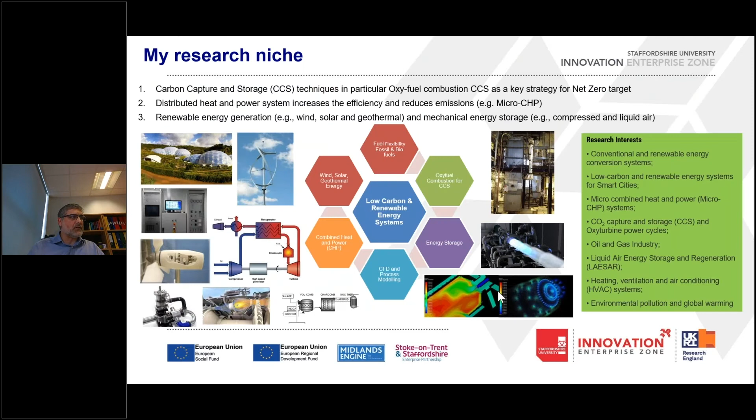All right. The headline of the talk, I'm having two monitors, so bear with me to make sure I'm synchronizing these two very well.

So, are we responsible for global warming? That's the first question to answer. And definitely, if we are responsible, we need to act accordingly. And the Paris Agreement was actually a conclusive effort of all nations to tackle the issue of global warming. So I'm going to give you a picture of the UN Environment emission gap reports and the recent report published by the International Energy Agency, Global Energy Review 2021.

And in particular, we're going to be focused on carbon dioxide emission, sustainable development scenarios, and how to react towards the aim and objectives of net zero in heavy industries, by using renewable energy systems, by using carbon capture, storage, and utilization, and looking into green buildings and electric vehicles. And at the end, I want to have a few snapshots on the UK 10-point plan for a green industrial revolution and how we are coping with that plan to achieve net zero.

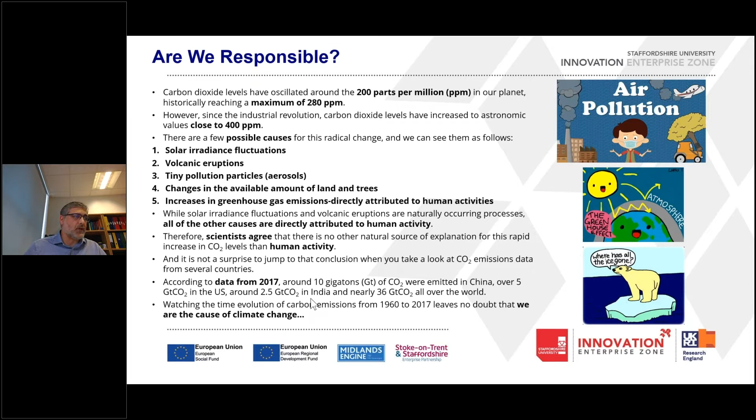Of course, there are some natural causes like volcanic eruptions, solar fluctuations, pollution particles, and land and tree uses, changes in available amount of land and trees. But increase in greenhouse gas emission attributed to human activities seems to be the only one which nature cannot deal with. So we can see that jump in level of emission since the 19th century, or after the Industrial Revolution, until now.

Consequences are really complicated and difficult to deal with, from rising of seawater levels to longer and harder droughts across the world, destruction of the ozone layer, heat waves, and of course what we see nowadays, strong hurricanes, storms, snowfalls, hailstorms, and sandstorms all around the world. So clearly we see the effect of that emission increase in carbon dioxide and other greenhouse gases globally.

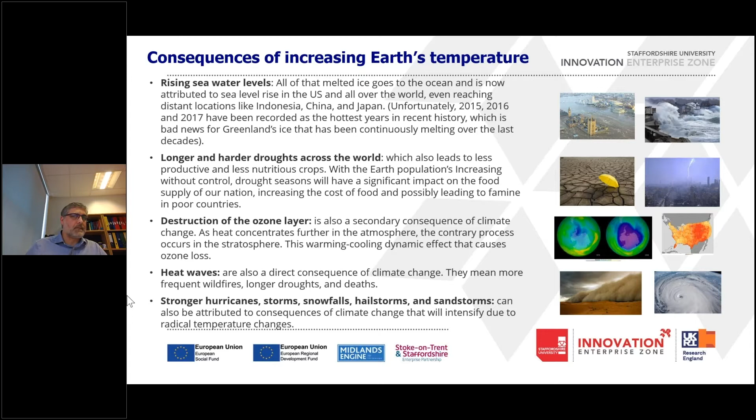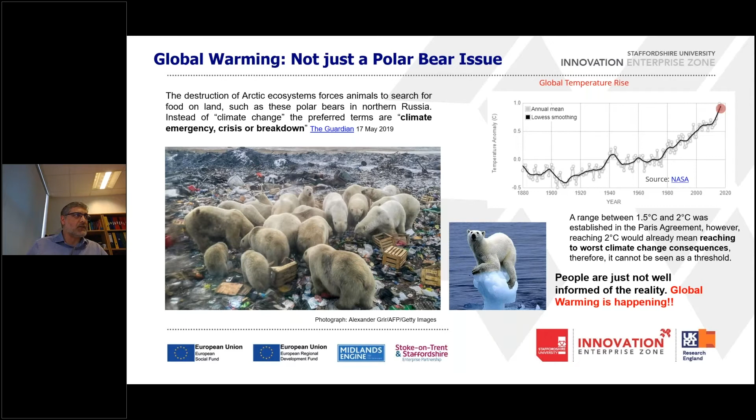Is that only a problem for polar bears? When we talk about global warming, normally images like what you see in the middle are what make us think this is a time to act. But the picture presented in the Guardian in 2019 shows polar bears are approaching cities in North Russia, actually for food. And that means it's not climate change. We need to think about climate emergency and crisis or breakdowns.

That's great. Nations came together. They decided in November 2016 to help each other and help the planet to survive. And since then, efforts and plans are being published and several fundings are being allocated, although there's still a long way to go to make sure the temperature of the globe is not going to rise more than 2 degrees by 2050. And of course, we need to aim for less than that level, hopefully approaching 1.5 degrees maximum.

This is a very good slide actually from the report published by IEA straight after the Paris Agreement, and it showed us how different technologies can play their own role to tackle the issue of climate change. This graph shows if we want to stick to the 2-degree scenario, renewables have 32% of the global carbon emission reduction, avoidance, or capture by 2050, followed by CCS, carbon capture and storage, 12%. And that 12% is a huge amount of carbon emission. That's around 94 gigatons of carbon dioxide that has to be captured by 2050 using carbon capture.

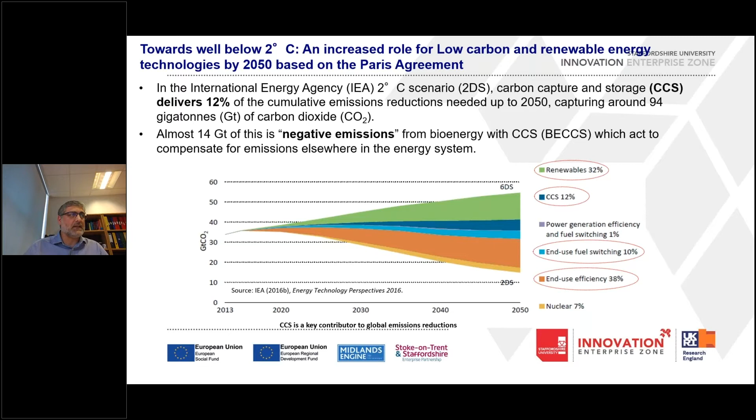Or in addition, negative emission, which means burning biofuels as a renewable source of fuel and, on the other side, capturing CO2. That's going to have a share of 14 gigatons by 2050. That's called bioenergy with CCS, or BECCS. It's really interesting to see end-use efficiency has got a big share of 38%, which has been increased to 40%, and fuel switching nowadays is quite important. So alternative fuels, including biofuels and hydrogen, are progressively advertised and promoted to tackle the issue of global warming and carbon dioxide emission.

This is a more recent report from IEA. As you can see, efficiency will have a share of 40%, followed by renewables, which now have a share of 35% of the total target by 2060. And CCS will have a share of 14%, followed by nuclear 6% and fuel switching 5%. So all the technologies which will have to come together to help us achieve net zero are going to be a branch of one of these main solutions or main technologies that contribute towards net zero.

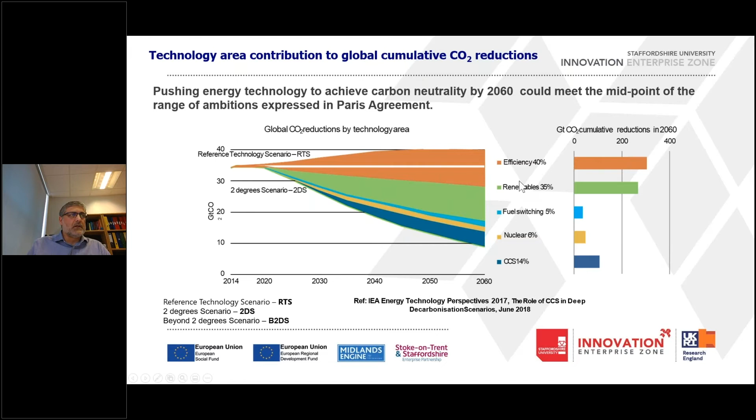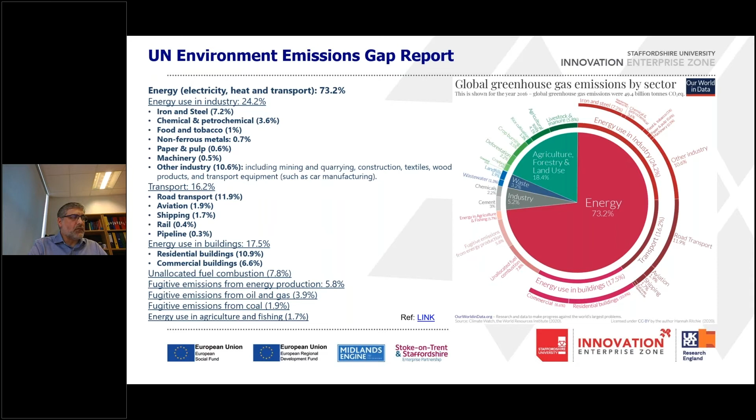The UN Environment Emissions Gap Report shows that energy-related activities are the main source of global greenhouse gas emission. This is a good graph showing how energy has a share in greenhouse gas emission by sector. Energy use in industry has a share of 24%. Transportation has a share of about 16%, followed by energy use in buildings, about 16–17%. And it goes on to other sources of energy use. In all cases, energy is the main factor in terms of carbon dioxide emission, based on this UN Environment Emissions Gap Report. For that reason, the Global Energy Review 2021 from the International Energy Agency has been published.

Quite informative reports prepared by IEA. There are several general facts. First of all, global carbon emissions are set to jump 1.5 billion tons this year after the economic recovery from the COVID crisis. So we've had a little bit of a drop in 2019 and 2020, but again in 2021 we see that although the COVID crisis is still ongoing, the energy industry is going to recover, and emission is something which we have to be aware of and act upon.

So global energy-related carbon dioxide emissions are heading for the second largest annual increase ever in 2021. Coal demand is actually exceeding the level of 2019. In some countries, European countries, coal mining and coal burning have decreased tremendously. But in some countries like China and the US, we see coal still having a major share in the portfolio of energy generation.

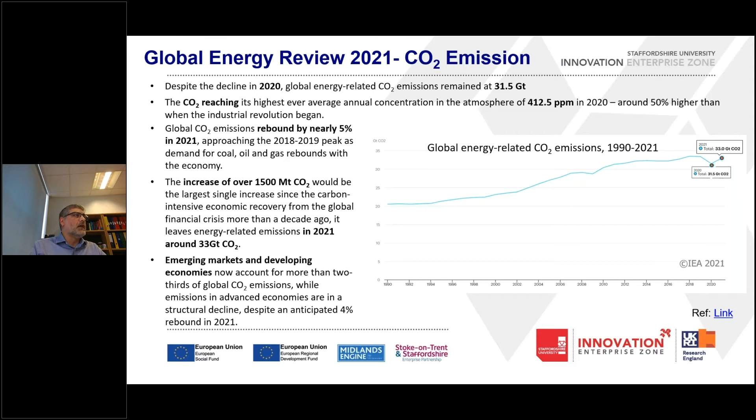All right, what do we need to do? We have to have sustainable development scenarios developed. Of course, there are sustainable development goals, SDGs, and based on those, we need different scenarios to be able to tackle global warming, to tackle emission of carbon dioxide, and to maintain the temperature increase of the globe around 1.5, 1.6. In fact, 2 degrees C is the highest we can imagine.

We shouldn't be comforting ourselves with a 2 degrees C scenario. And of course, the 1.5 degrees C scenario above pre-industrial temperature level requires a lot of attention and, as I said, different scenarios to act upon and basically invest enough to be able to capture enough CO2, remove enough carbon dioxide, and avoid enough CO2 to make sure we're achieving the targets of net zero.

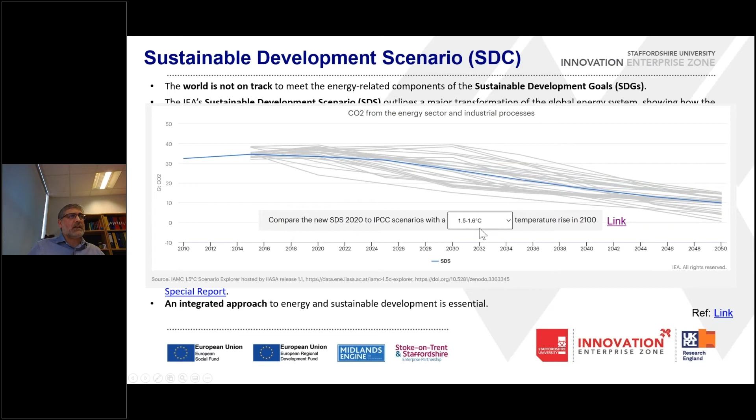This is a good picture. There is a link here. We can change and compare sustainable development scenario goals separately. If we change temperature here, when going to the link, you see the blue graph is going to move, and shows how change of that temperature increase is going to affect the level of emission.

Excuse me, give me a second.

So what is clear, the world is not on track to meet energy-related components based on sustainable development goals. For that reason, we have to have different actions done, and these actions are summarized in the next few slides, which I'm going to present. First of all, we have to think about improving the share of renewables. As you have seen from the IEA report, a share of up to 35% is allocated to renewables.

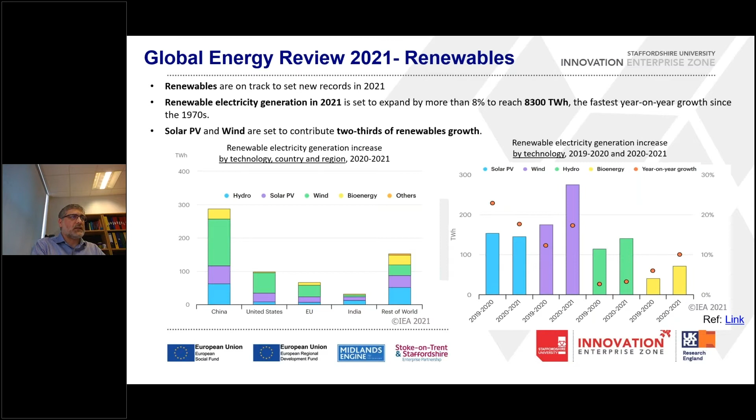So as you can see, solar PV and wind are set to continue to contribute 2/3 of the renewable growth by 2020 and 2021. This picture, left-hand side, is renewable energy generation increase by technology, country, and region, and the right-hand side shows it only based on technology. So you can see wind has got the maximum growth in terms of renewable energy share in 2020 and 2021.

Industries, I think, are one of the major sources of global greenhouse gas emission, which has been receiving the minimum attention. We have been focused on power stations and the power industry, but industry processes, including steel, cement industry, glass industry, all have a huge amount of emission, and they need our attention, particularly burning mainly fossil fuels, because they need high temperatures.

For instance, in a steam cracker, 1000 degrees C. In a blast furnace, we need 1500 degrees C. So the high temperature requirement of heavy industry is one of the main challenges we are facing in terms of achieving net zero emission in heavy industries.

These industries normally have long-lived capital assets. They are built typically to work for 30, 40 years. It's not easy to retire them early and switch to alternative technologies, because this is really costly. There are processes that have emissions, and these processes involve different raw materials and have limited market applicability.

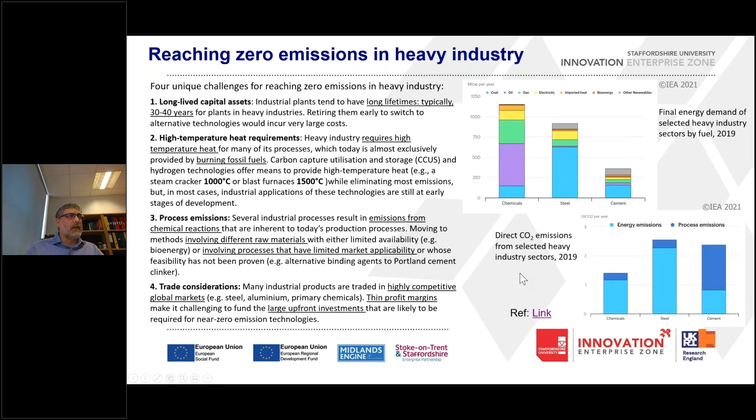In terms of efficiency improvement, which is another aspect of net zero, as we've seen, 40% of the share goes to energy improvement. New technologies have to kick in. For instance, we need to think about green buildings, which can survive by themselves. They have their own means of heat and power generation, which are mainly renewables or low carbon technologies. We have to think about integration of cogeneration technologies, because the combined efficiency of cogeneration technology is normally higher than when we generate electricity in a centralized manner.

In terms of material efficiencies, improving efficiency of furnaces, steam turbines, gas turbines, and bringing new technologies, these are all important aspects to be able to cover that 40% emission reduction using efficiency improvement. In fact, a good sentence is: energy efficiency is the first fuel for achieving high ambition climate goals.

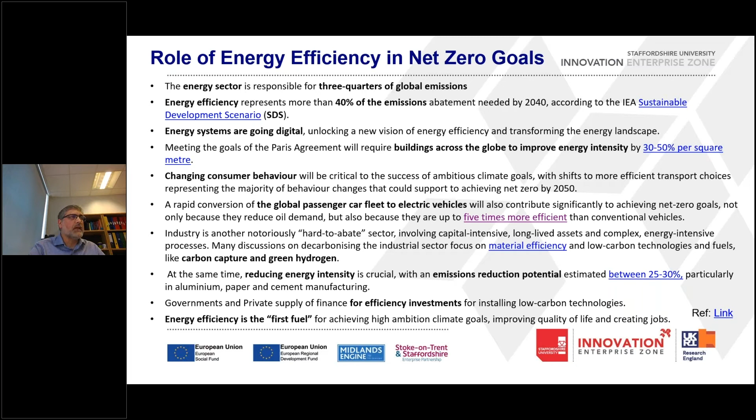Another aspect of net zero emission is green building envelopes. Unfortunately, still in 2019, 2/3 of the countries are lacking mandatory building codes, energy codes. So that means more than 5 billion square meters were built last year without mandatory performance requirements. That is a red flag that shows from the building industry we have a lot of work to do. Energy intensity reduction in buildings is quite important. Insulation, using renewable sources, capturing CO2 from small scale, let's say boilers and heating or cooling systems, that's quite important.

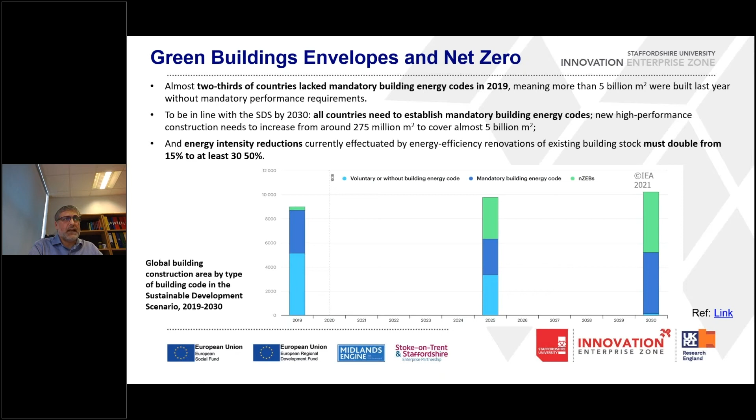2020 seems to be the decade of electric drive. We have had announcements from governments to stop building new diesel and petrol engine cars. The global electric vehicle outlook has been published, and it seems the electric vehicle stock has been boosted to 7.2 million electric cars in 2019, which is quite impressive. But this is going to increase as we speak, and we're expecting to see more battery electric vehicles and plug-in hybrid electric vehicles in 2021 and onwards. This means, again, another key milestone and another important pillar towards net zero emission.

I have spoken about carbon capture, utilization, and storage. This is a key milestone and a key pillar for the net zero targets. It's literally impossible to achieve that target without storing carbon dioxide in underground reservoirs, which might also help in recovery of oil and gas. But the point is, there are carbon capture technologies out there. There has been good funding to support the research. Now it's time for government and private investors to act and help industries and the energy industry to install carbon capture plants, as well as to make sure there are means of transportation and storage available.

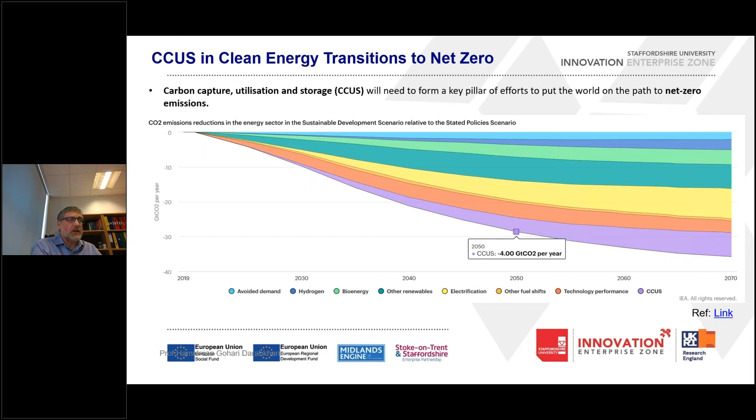So this picture gives another aspect of net zero by 2070 in this scenario published by IEA. By 2020, net carbon dioxide emission is expected to be about 34 gigatons, but that net emission should drop to 27 by 2030, drop to 9.4 gigatons by 2050, and achieve net zero by 2070, according to this report published by the International Energy Agency.

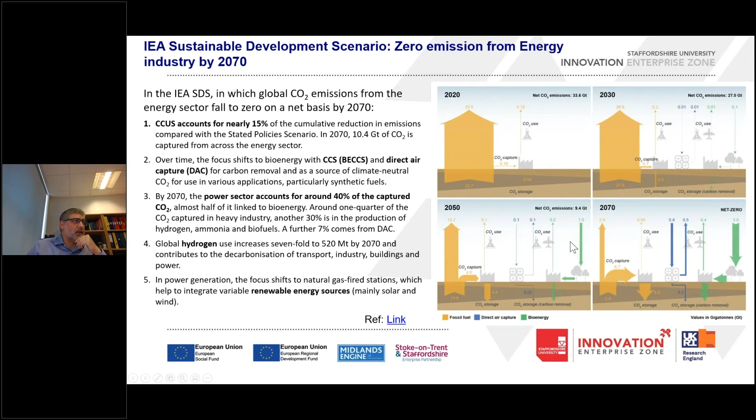Do we have enough means of CO2 storage? Yes, the focus of research in CCS is now being tailored towards the storage side. There are some publications available that show the world capacity to store carbon dioxide is quite acceptable, and definitely we need that storage level to be able to achieve net zero targets.

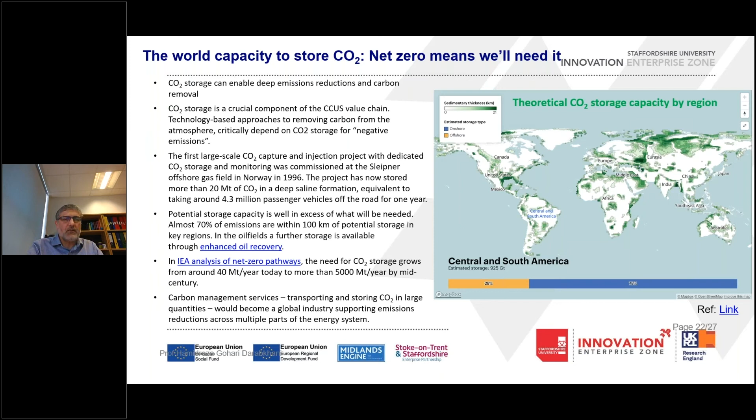What is important, of course, is that some part of this carbon dioxide is going to be utilized, used in industries, but the majority has to go to a storage site. But it does have another benefit, as I mentioned, in enhanced oil recovery and enhanced gas recovery.

So these scenarios are not unique. Countries and, on smaller scales, industries need to have their own net zero strategy plan, but they have to synchronize with each other and sing together to be able to achieve the net zero target globally.

Chapter 3 of the report is about impacts and risks, and chapter 4 about global response, which is essential and necessary to achieve the IPCC 1.5 degrees C scenario. And chapter 5 is about sustainability and equity, about interactions of climate change and climate response.

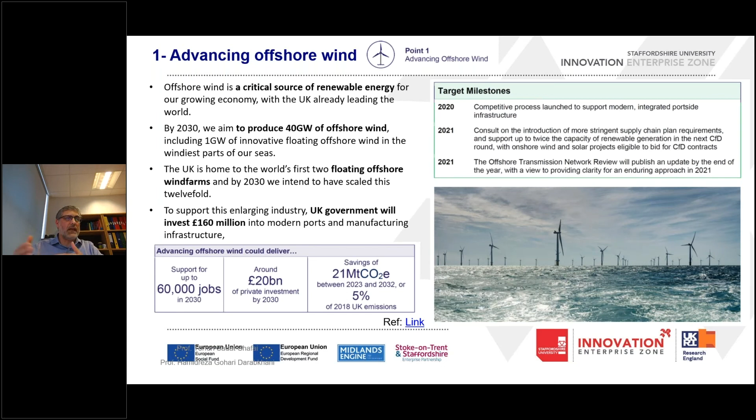Low carbon and hydrogen is quite important. Hydrogen is not just the fuel of the future, but it's the fuel of the present. At Staffordshire University, we have particularly focused our attention on hydrogen combustion, and there are publications that we have recently published in terms of design of small-scale hydrogen combustors for micro gas turbine systems, and hopefully in future for boilers and burners and so on. It followed the successful experience we had in burning biogas in micro gas turbine systems.

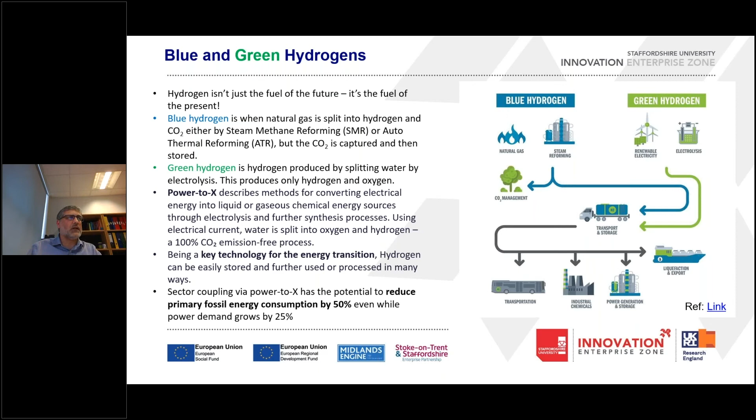This is a very good graph I found from Siemens. We have two forms of hydrogen, blue hydrogen and green hydrogen. Blue hydrogen comes from steam methane reforming, and green hydrogen normally from separation of hydrogen and oxygen from water, hopefully from renewable electricity sources. And this picture shows how different industries can act in terms of hydrogen generation and hydrogen consumption.

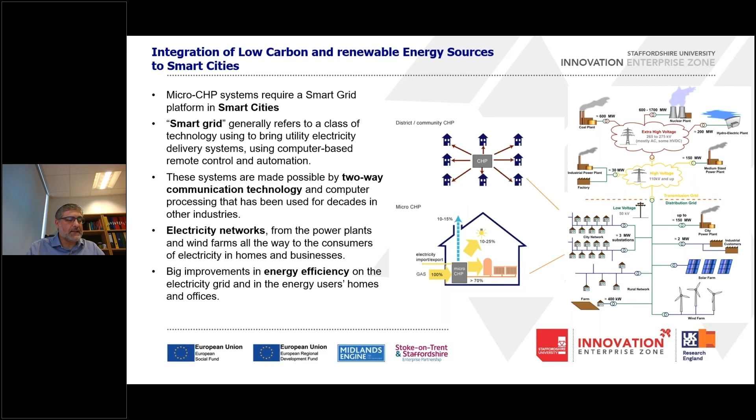And finally, all these technologies we discussed need to come together and join in a smart network in smart cities. So if we have wind farms, solar farms, power stations with capture, micro CHPs and geothermal energies, all of these technologies need to be able to synchronize. We still have challenges in synchronizing electricity generated by renewables with electricity generated by fossil fuels. And there are good investments and research ongoing to tackle the issue. In some countries, a smart grid is still a challenge. Without that, it's not possible to have smart cities and net zero emission buildings.

To summarize, watching the time evolution of carbon emission leaves no doubt that we are the cause of climate change. We are responsible for 3/4 of the global emission. The world is not on track to meet the energy-related requirements based on the sustainable development goals, but there are very good movements ongoing in some countries, and of course this is a global effort. Wealthy countries need to help others to be able to achieve goals and targets.

Energy efficiency is a quite important factor. So steel technologies, which are carbon intensive, have to achieve higher efficiency levels. Renewables have a good share: improving the efficiency of renewables, switching to less harmful renewables, for instance organic photovoltaic instead of silicon photovoltaic, and making hybrid systems, which combine renewable and fossil fuel systems with capture, is quite important. Electric vehicles, green buildings, and hydrogen and alternative fuels have their own share of net zero target scenarios. We shouldn't forget the important pillar of CCUS, carbon capture, utilisation and storage. We cannot achieve the target without that.